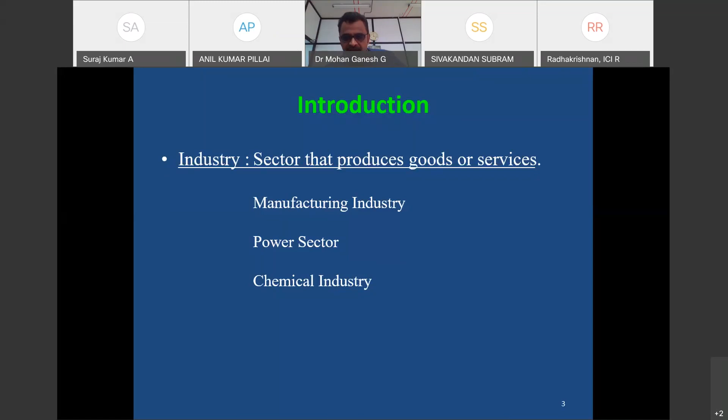Introduction. You know very well about the industrial sector. Many sectors are there that produce goods and provide services for us. Out of all, the manufacturing industry, power sector, and chemical industry are the most common ones directly helping the civil engineering community. In the power sector, a number of power plants produce power and electricity for all, but at the same time they cause air pollution as well as land pollution.

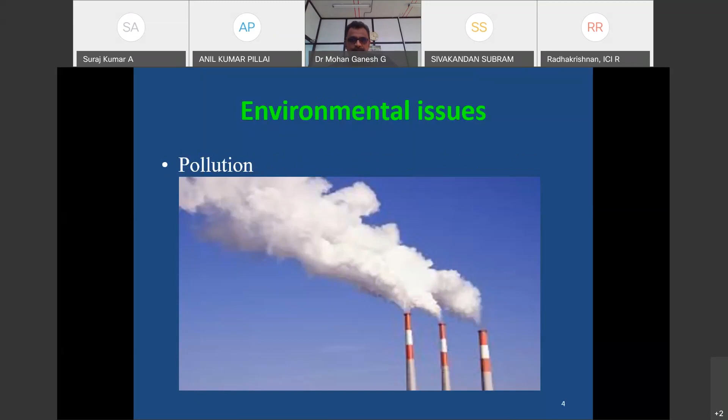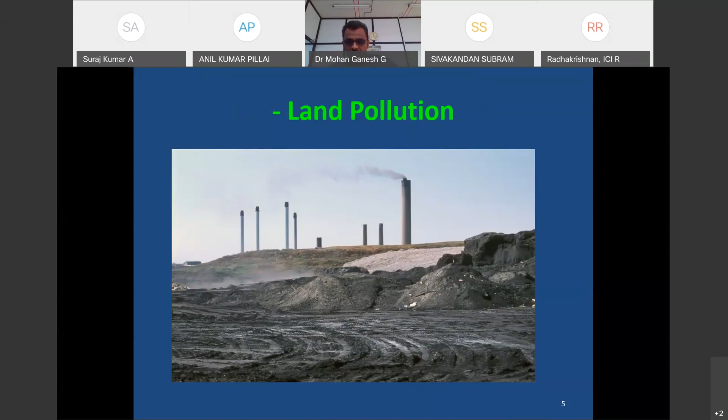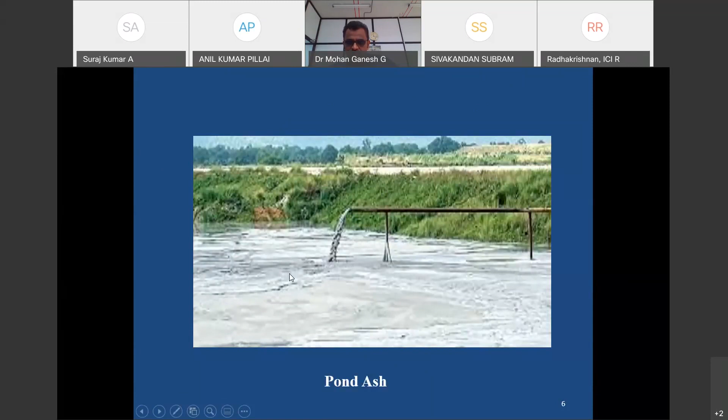This picture shows the waste bottom ash and waste pond ash dumped near an unused pond. Here, this picture shows the wet pond ash being pumped into the ash pond, where it is permanently stored for 10 to 15 years or even 20 years. Here is the bottom ash, which is collected under the hopper.

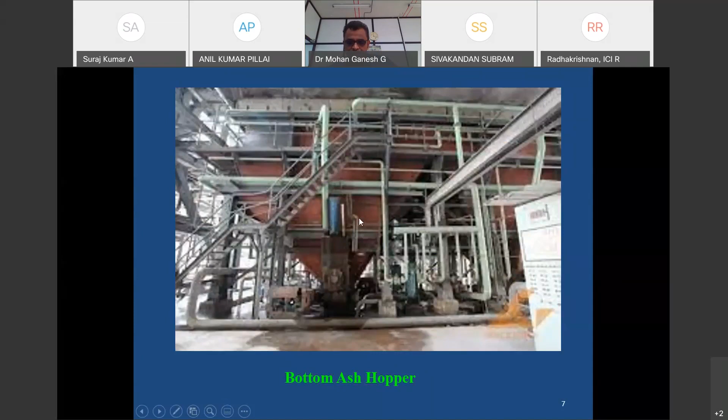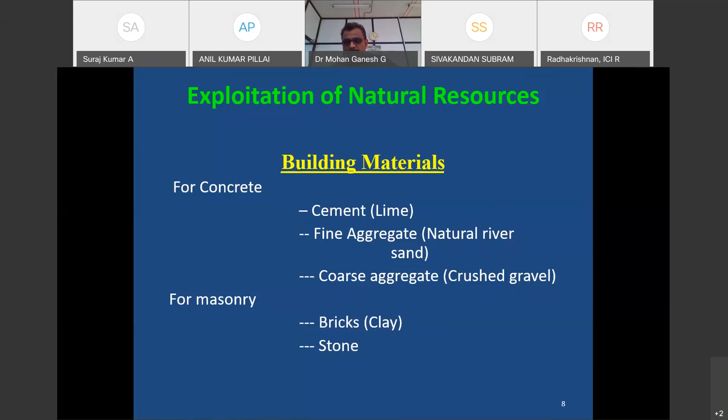In the exploitation of natural resources, for our civil engineering building materials, for cement we have to depend on lime. For sand, we depend on the natural river. For coarse aggregate, we need crushed gravels. And for manufacturing bricks, we need clay. So for all our civil engineering materials, we need natural resources. But over a period of time, now we are facing the sand problem, so we forcibly have to use manufactured sand.

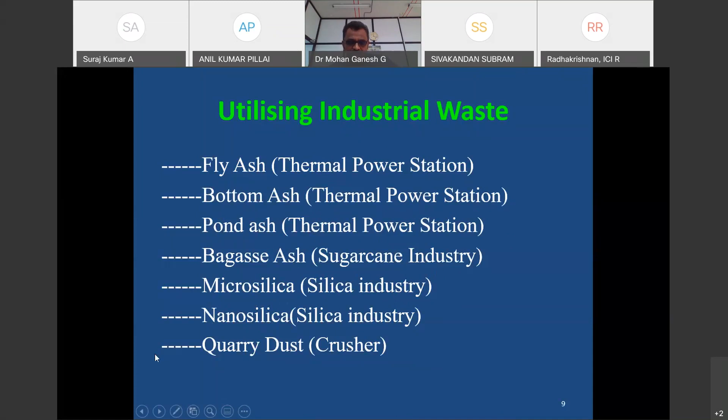Various industrial wastes: the thermal power station produces fly ash, and again the thermal power station produces bottom ash as well as pond ash. Sugar industries produce bagasse ash. Silica industries produce micro silica, and also nano silica. The crushers produce quarry dust or M-sand now.

So for any alternate building material we want to choose, first we have to find out the physical and chemical composition of the material.

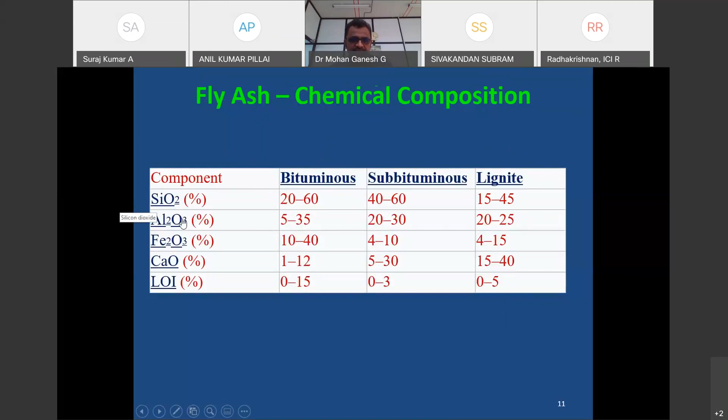Now for fly ash, there are 3 different types, Class C and Class F being the most common. Class C means high calcium fly ash, from lignite based sources, so our Neyveli Lignite Corporation produces lignite based fly ash. Other power plants produce Class F fly ash. The composition of the ash again includes silicon dioxide, Al2O3, ferric oxide, and calcium oxide.

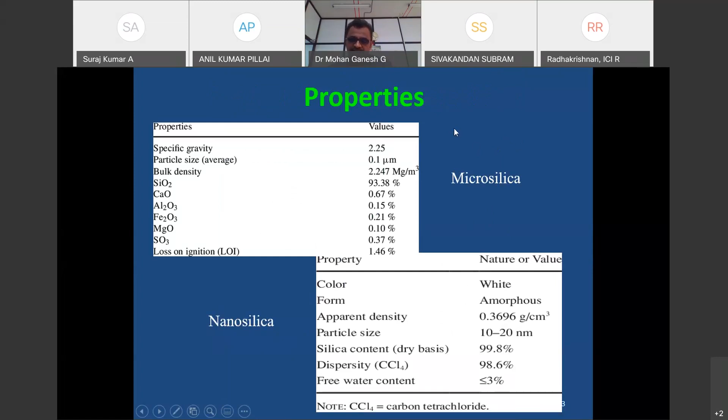Sand also generally we are using contains silica, alumina, and other materials. Now microsilica, again the most common material nowadays we are using, is obtained from the silicon industries. Here is its chemical composition.

So all the materials which are having CaO, silicon dioxide, or Al2O3 aluminum oxide - for choosing any alternate material, first we have to find out how much percentage of either calcium oxide, silicon dioxide, or aluminum oxide is there. Suppose some new material does not contain any of this, then it may not be suitable for our construction work, because we have to find the suitability of the material.

That is the reason I said in the beginning that for any alternate material, it is required to find the chemical composition first. Then only we can get the binding property of that. Otherwise, it will act as an inert material only.

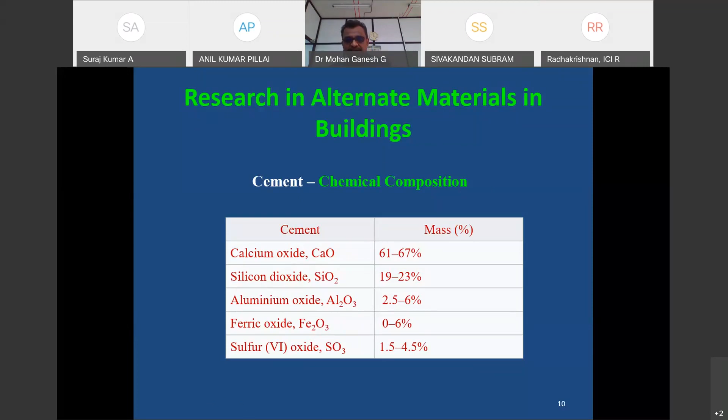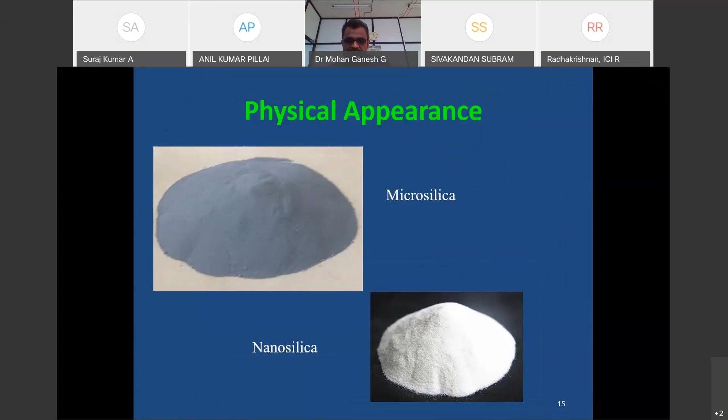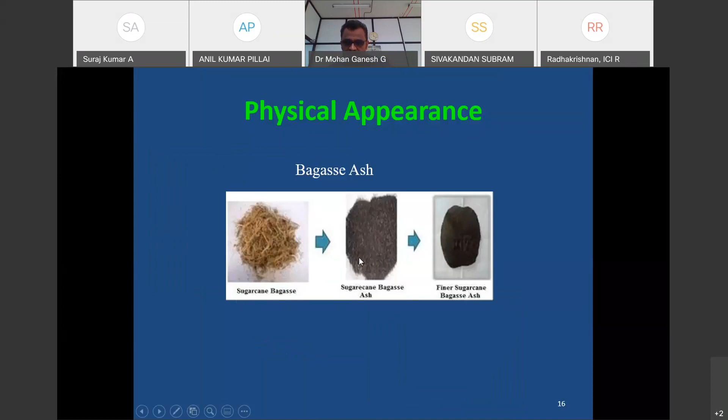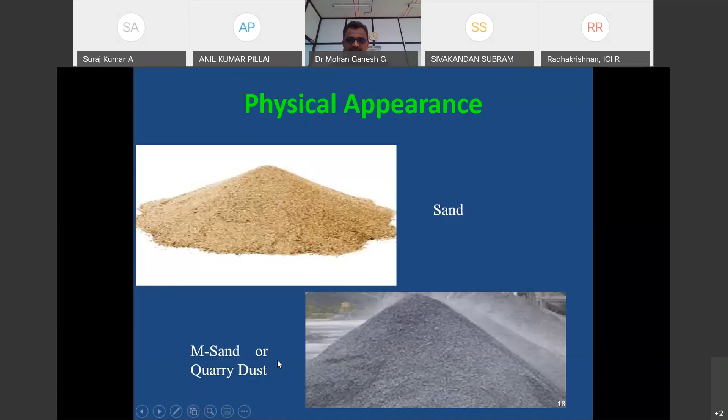Now mainly for either fine aggregate or coarse aggregate, we have to do the particle size distribution. Then only we can apply the particle packing theory. So we have to conduct the test and plot it, then adjust the particle size distribution accordingly. Then only we can get proper bond or proper interlocking between the fine aggregate or coarse aggregate in the concrete. This is compulsory for both fine aggregate and coarse aggregate.

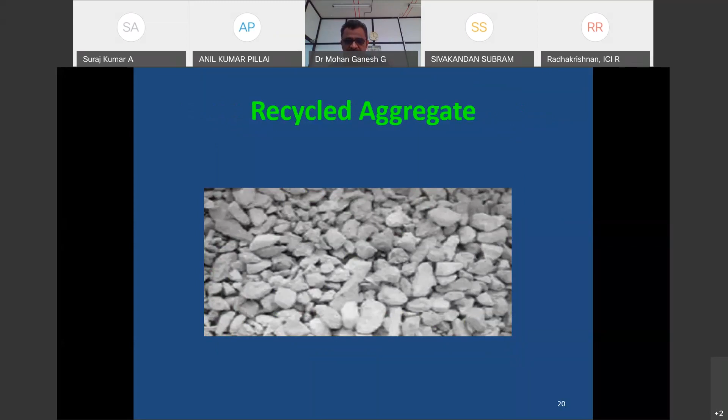Nowadays, people have also started to use recycled aggregate, mainly from the demolition of concrete or the demolition of buildings. For this also, again, we have to use the particle size distribution.

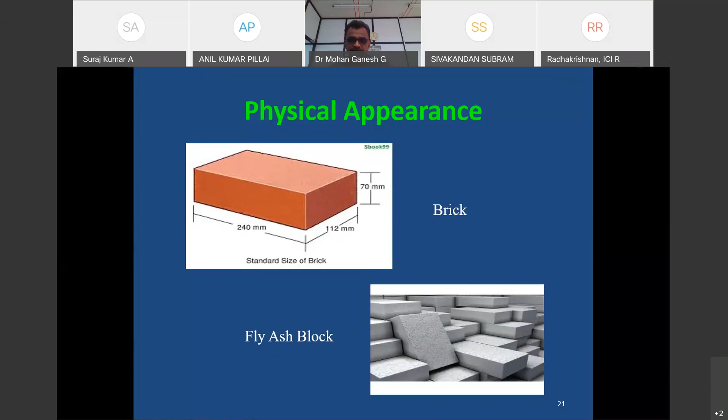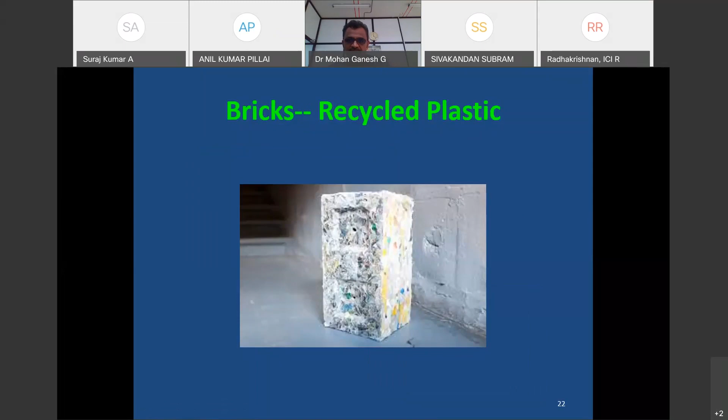The other one is recycled plastic. Nowadays, the disposal of plastic is a common problem. Some institutes, some R&D organizations, have initiated this, and now they are making bricks using recycled plastics.

For any alternate material, I want to say that first we have to check the physical property and find the chemical property. Then only we have to proceed further.

Then the next property is mechanical property. Mechanical properties mean the compressive strength of the material, tensile strength of the material. Then we have to find the flexural strength of the material. These are the basic 3 properties needed for the structural aspect of materials.

Then for the durability aspect, we have to conduct 4 basic tests: rapid chloride permeability test, water absorption test, sorptivity test, and chemical attack test.

Now, just out of the box, I want to give one virtual assignment to you. These are all the materials I want to give: 1 liter of milk, 1 liter of water, 1 kg of sugar, 1 kg of tea powder, elachi, and masala. The requirement is you have to make 300 ml, 2 cups of tea, one for you and one for me.

So suppose now nearly 150 participants are there. Is it possible? Can we get the same quality of tea from all? Obviously, it is not at all possible, because some person may use more quantity of milk, some person may use more quantity of water, other person with sugar or without sugar or light sugar.

Some kind of people are there, they want strong tea or light tea or normal, medium. So many terms are there. Again there are additional add-ons like elachi or masala. Somebody will use elachi tea, and if it's free, they want to go for the full flavored elachi strong tea. So with 150 people, it's too tough to find the same tea from even 2 of them.

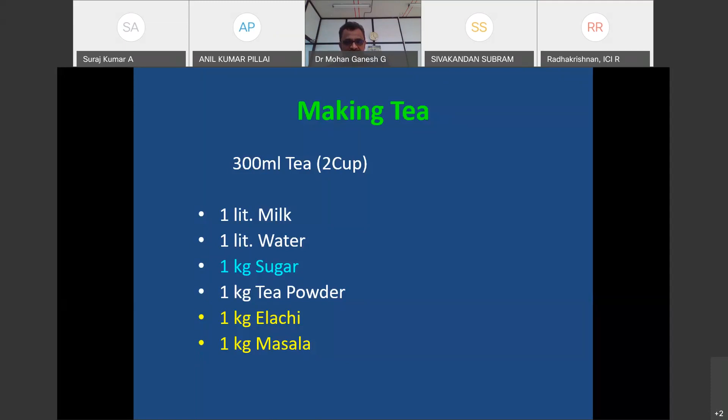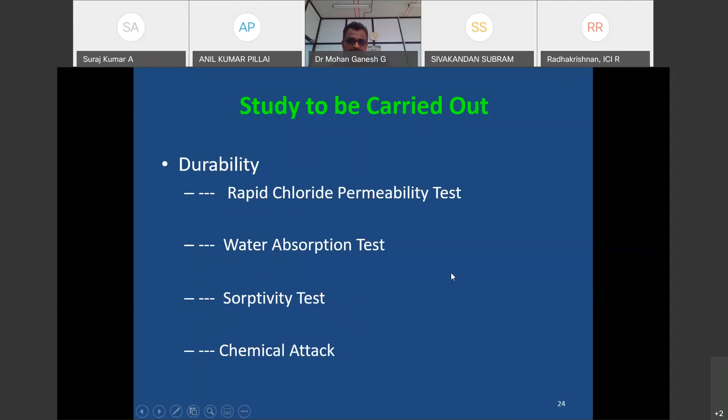Now, for any alternate material, first we have to do the chemical analysis, then physical analysis also parallelly. This is the first phase. Second phase, the detailed mechanical properties we have to find out, like compressive strength, tensile strength, and flexural strength. Then the third phase for durability aspect, RCPT or water absorption or sorptivity or chemical attack we have to do.

So at VIT, we have done research on so many alternative materials in buildings. We are going to see all of that. Now, before that, I want to talk about waste management.

What is waste management? What is the need to do waste management? How to control that? If you are not doing the waste management, what are all the effects we are going to get? So for all these questions, I have given the answer. The activities and actions required to manage waste from inception to disposal, that is called waste management. That includes collection, transport, treatment, and disposal of waste, together with monitoring and regulation of the waste management process.

The main aim to do waste management is to reduce the adverse effect on health and environmental aspects. One more thing I want to say is that the practice is not at all uniform in all countries. For example, the Singapore government, advanced developed like US or UK, they are following stringent rules for maintaining the waste. But in India, we are liberal, though nowadays we are changing the rules.

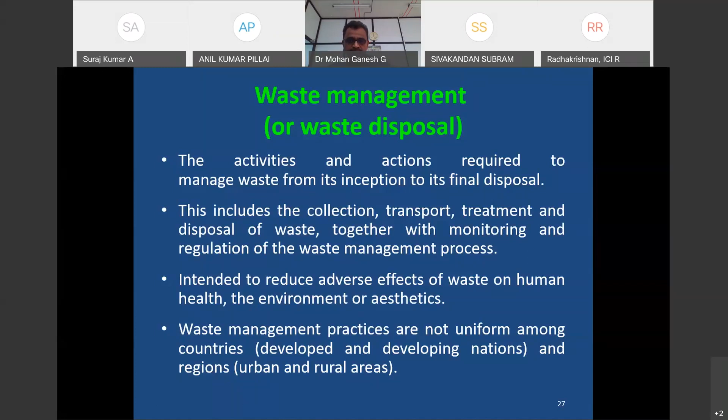Now, for making good sustainable concrete, we have to utilize industry waste or byproducts to replace the raw materials for making concrete. The raw material may be either cement, fine aggregate, or coarse aggregate. So with that, easily we can make the sustainable concrete.

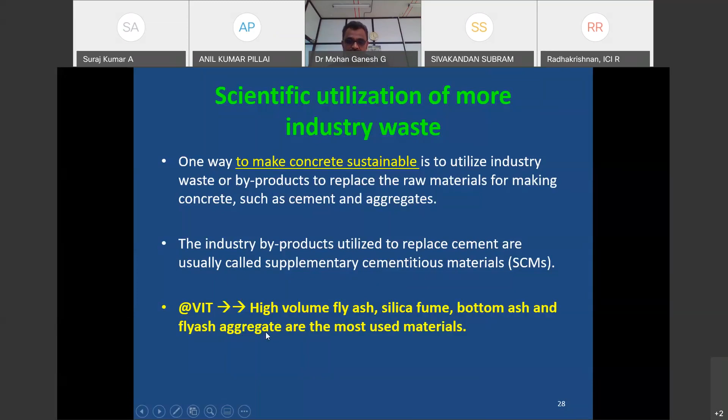Here, suppose if we replace the material with cement, it is called supplementary cementitious materials, simply SCMs, also called binder materials. At VIT, we have done high volume fly ash concrete, up to 60% replaced with fly ash. Silica fume also we have used, up to 10%. Bottom ash up to 50% we have used in place of sand. Again, fly ash aggregate also we have done in place of coarse aggregate. These are the most common materials people are using nowadays.

On the other hand, the indirect benefits are: by using more quantity of fly ash, it reduces the rise in temperature inside the concrete. So fly ash concrete or high volume fly ash concrete is recommended for mass volume concreting. Further, it reduces shrinkage, increases durability, and can gain strength at later days, 56 days or even 90 days. At VIT, we have even done up to 365 days compressive strength.

The next one, bottom ash. Bottom ash mainly nowadays people are replacing with fine aggregate. Nowadays some power plant bottom ash is equivalent to cement, so people are replacing even with cement also. But here I want to limit it to only fine aggregate, since NLC bottom ash is equivalent to our sand, which we will see later. So by using bottom ash in concrete, it conserves the river sand, reduces the cost, and reduces disposal problems. This is a direct benefit.

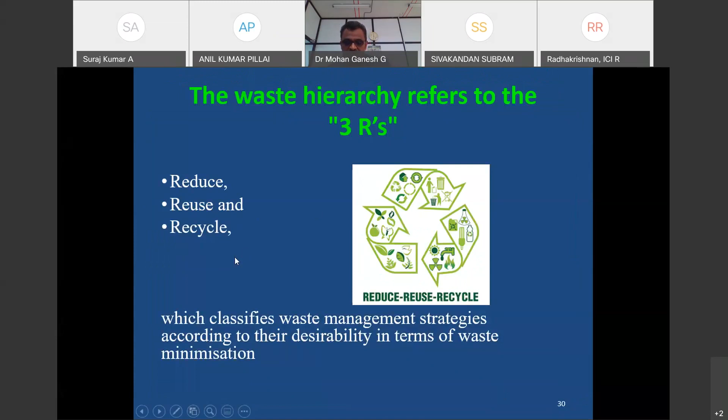Like the 3 R's you all know - reduce, reuse, and recycle. So based on this only, we have used fly ash, bottom ash, and fly ash aggregate in the concrete.

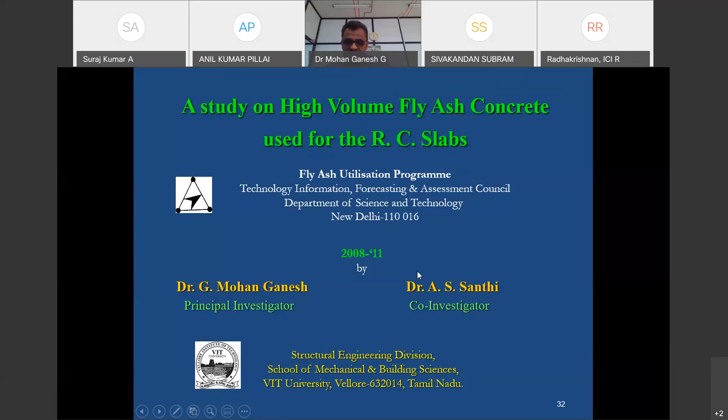It was done in the years 2008 to 2011, 10 years back. I was the principal investigator. My colleague Dr. A. S. Santhi was a co-investigator. I am going to give the details about this project. What is the need? Already I said to you, we need power. So the easiest way is to increase the number of thermal power plants. Once we construct a thermal power plant, automatically the problem will be the disposal of the fly ash.

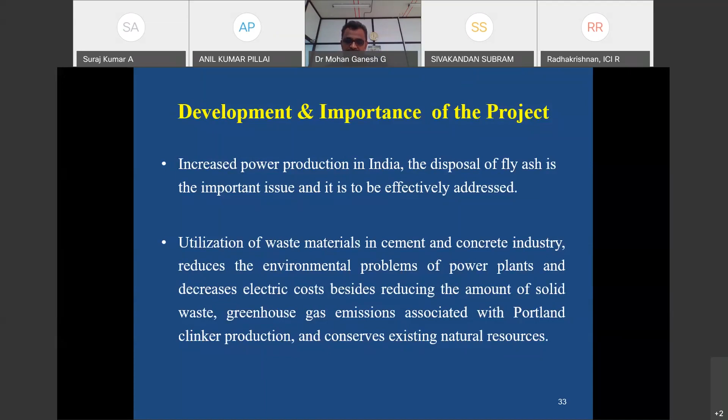So to use it effectively, the best, easiest way is to put it in the cement. The present IS code gives a recommendation of up to 35% fly ash in place of cement. That's called PPC, everybody knows, but most people are not directly using it, though RMC plants are using it. In this study, we went up to 60% replacement of cement with fly ash. For that, we have done a very detailed program. It was a 4-year study.

In the first phase, we collected the different materials and studied the compressive strength for different grades and different percentages of fly ash with different types of curing for various periods. In the second phase, we did various hardened tests, mechanical properties like compression test, split tensile strength, flexural strength, and chloride ion test. In the third phase, we did the RCC beams and slabs for the scaled models.

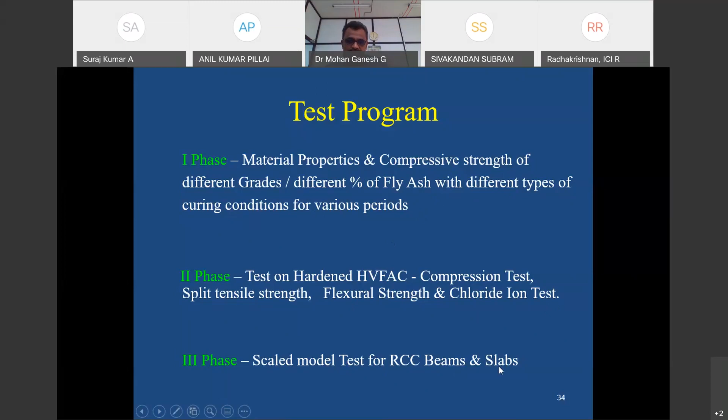For this project, we used a lignite-based fly ash obtained from the Neyveli Lignite Corporation, and class F fly ash, that is low calcium fly ash, from the Ennore thermal power plant. Using a high volume of fly ash in concrete will reduce the consumption of cement as well as the CO2 emission. This is a thumb rule everybody knows: production of 1 ton of clinker releases 1 ton of CO2. So with 50% replacement, nearly half a ton of CO2 we can minimize.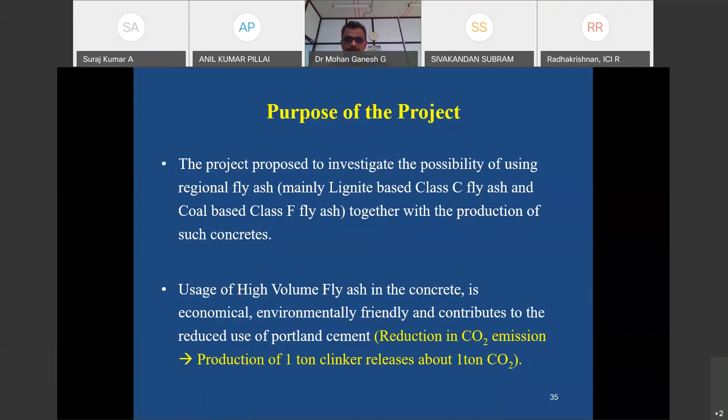Now, either IS code or Euro code, for finding the strength, they always say a minimum of 3 cubes we have to test at 7 days as well as 28 days. For M30 grade, that is the process: after 28 days of curing, we do the compressive strength test. But for this project, since we went with different percentages, we cast nearly 50 plus cubes in a single casting. This picture shows the complete view of one set of casting.

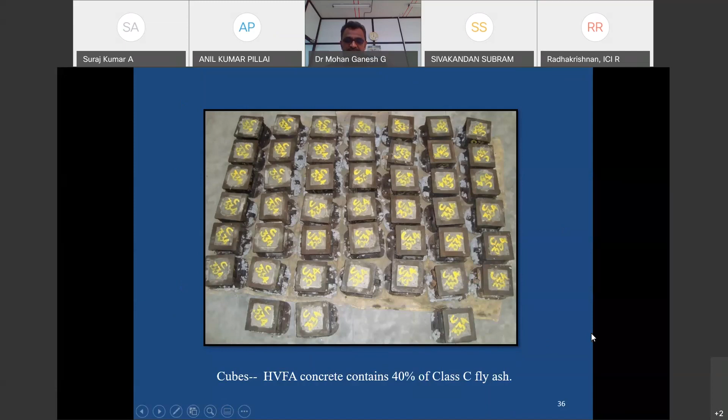For curing, we followed different types of curing, such as accelerated curing. What is the meaning of accelerated curing? After 24 hours of casting, the molds with cubes were kept in hot water and we maintained around 98 degrees centigrade for 3.5 hours. After that, we demolded and did the testing, which gives nearly the 28-day compressive strength of the concrete.

The main purpose of these two alternate curing methods is that we can easily get the correlated 28-day compressive strength of the concrete. So we need not wait for 28 days. That is the main advantage of these two methods. The IS code recommends it, ASTM also recommends it. So we have done it for all our mixes.

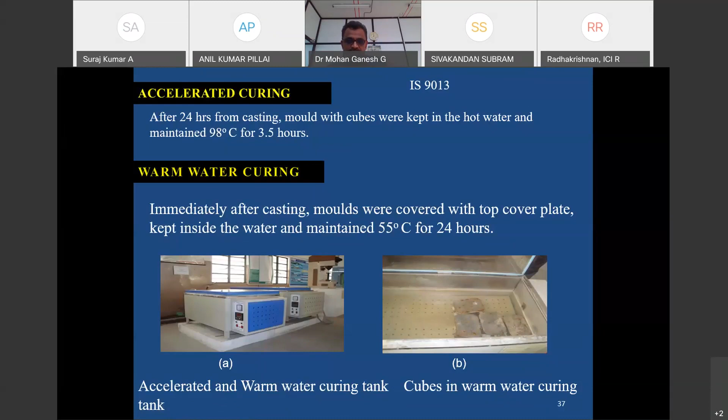Normal curing, you know very well. In the beginning itself, I said to you, up to 365 days curing we have done. The main reason for 365 day curing is we have replaced the cement with 60% of fly ash. So for that only we have done the 365 day. And again, already I said to you, the durability is the most important one.

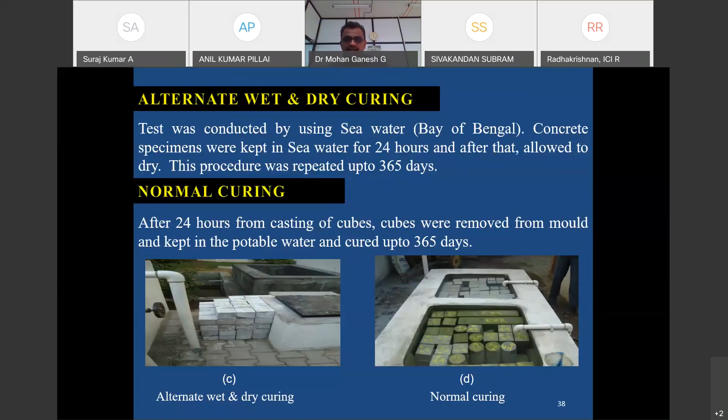So for this, we have collected the water from the Bay of Bengal, and parallelly we created a tank and we put all the specimens into the tank on alternate days. And this procedure was repeated up to 365 days to check the durability. Earlier we thought of simulating the seawater, because if we simulate the seawater, easily we can maintain proper quality control. But we want to know what is the behavior in the actual water. So for that only we directly collected it from the Bay of Bengal.

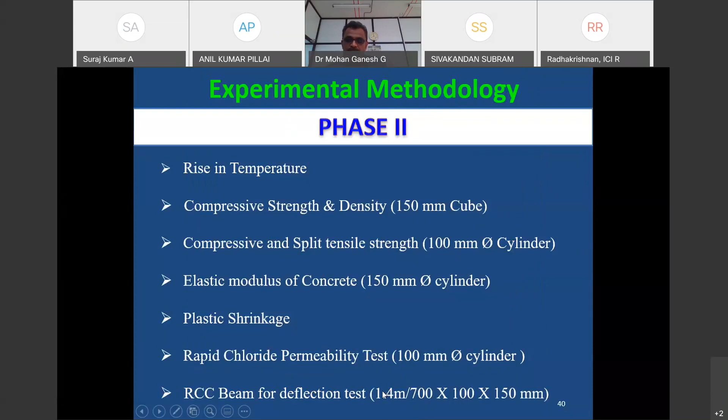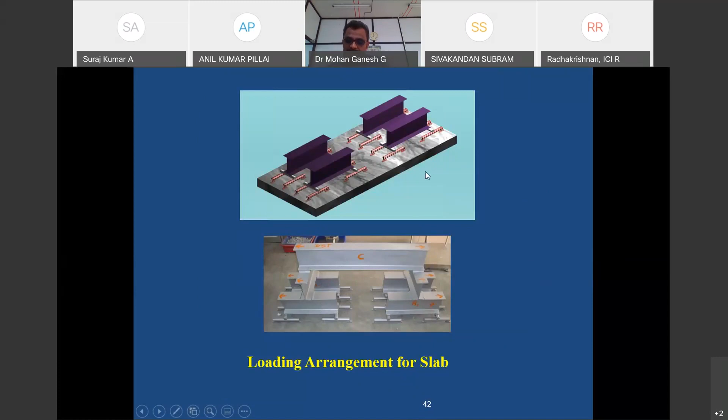This is the RCC slab. Using the hydraulic jack, we have applied the load. So this load is divided into 2 beams, and these 2 beams again divided into 4. And again this is divided in multiple ways. So in that way we have obtained the UDL on the RCC slab. All the readings we have recorded with the help of the data acquisition system.

Now I want to go for the bottom ash as well as fly ash aggregate. Here we have done the mix design with the low binder content, 333 kg per meter cube. Simultaneously, it is replaced with 0% of fly ash, 20, 30 or 40. And parallelly, we have replaced the fine aggregate with the bottom ash, which we obtained from the Neyveli Lignite Corporation. 0, 30, 60, and even 100% replacement of fine aggregate we have done. So at 100%, we did not use fine aggregate at all. Only bottom ash we have used.

For comparison purposes, we have maintained the constant binder content, and the slump cone value also at 10 to 20 mm. Here we have used high range water reducing admixtures, the superplasticizer.

4th generation SP we have used. So for maintaining this W/B as well as slump cone, and to get the proper strength and durability of the concrete, because nowadays super plasticizers are part of our concrete, so we have to add, so it will give a lot of positive effect to our concrete structure.

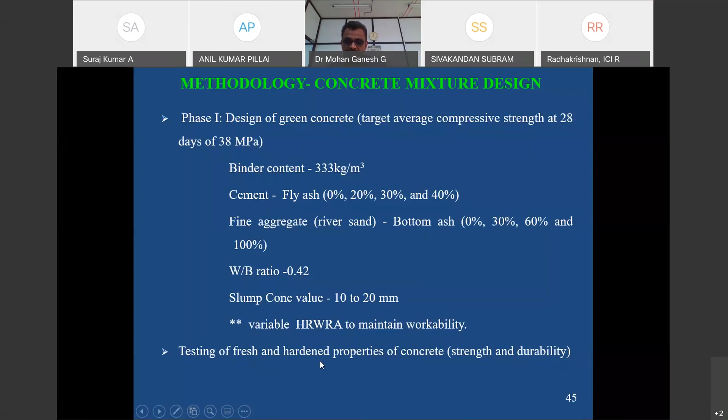So with this, we have done the testing on fresh concrete as well as hardened properties of the concrete. Hardened property means strength and durability aspect. So this is the methodology we have followed for testing the various materials. The fly ash, we have used the ASTM C618 for checking the physical properties of fly ash, and chemical properties like XRD, XRF we have done, and particle size distribution; consistency, specific gravity, initial and final setting time of the cement we have done.

And for fine aggregate and bottom ash, again the chemical properties using XRD and XRF, and various physical properties we have done: specific gravity, sieve analysis for grading, and water absorption. And for coarse aggregate and fly ash based aggregate, again the physical properties, specific gravity, impact test. Since we manufactured the fly ash aggregate, we should know what is the impact value as well as crushing value

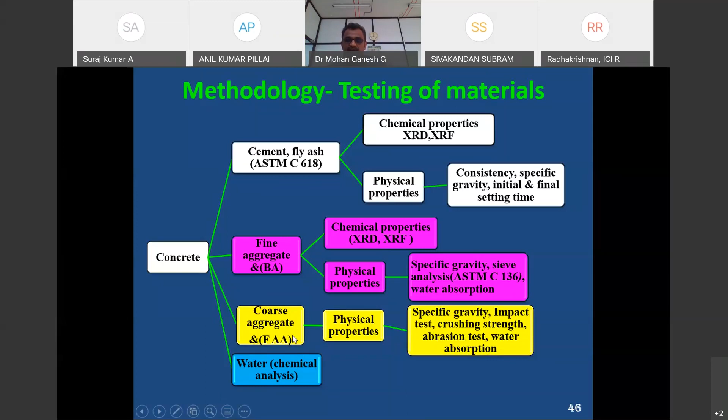and abrasion test. Everything we have done was compared with the coarse aggregate, and we have done the water absorption also. So finally, suppose you are using the fly ash aggregate, it should be at par with the coarse aggregate. There should not be any deviation.

The next phase, we have done the green concrete with fly ash and bottom ash. Here, the fly ash either 0%, that's for control mix, 20%, 30%, and 40%. Again, we have used the bottom ash in place of the sand with 0, 30, 60, and 100%. And these are the fresh properties of the concrete: slump cone test, rise in temperature. The slump cone as per ASTM standard C143, and these are all the various hardened properties of the concrete we have done. Again, the hardened property we can classify into strength as well as durability aspect.

The strength means the basic is compressive strength. So for finding the compressive strength, normal curing, then accelerated curing, warm water curing, we have done it. Strength aspect, the strength like split tensile strength, flexural strength, and modulus of elasticity we have done. And durability, RCPT, rapid chloride permeability test, plastic shrinkage, and drying shrinkage we have done.

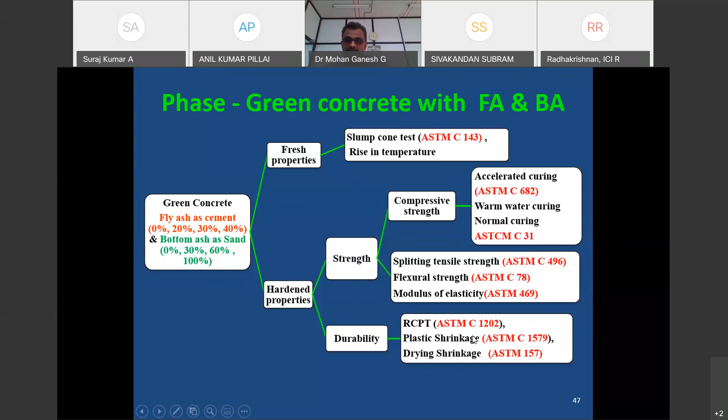Since the bottom ash is a coarser material, we have to do proper dosage, proper mixing, and proper care. If you are not doing it, it will give a reverse effect. So in that way, the plastic shrinkage will be very high, as well as drying shrinkage also will be very high. So we have to be very careful while using the bottom ash, with super plasticizer and all. So this is a must one. We have done all, and it was compared with ASTM standard.

Now, this is a basic property. Already I said to you. Sand as well as bottom ash, we have done the sieve analysis, and the particle size distribution curve we have plotted. This blue line shows the curve for the bottom ash, and red for the sand. Okay, both are comparable, and all other properties are given here.

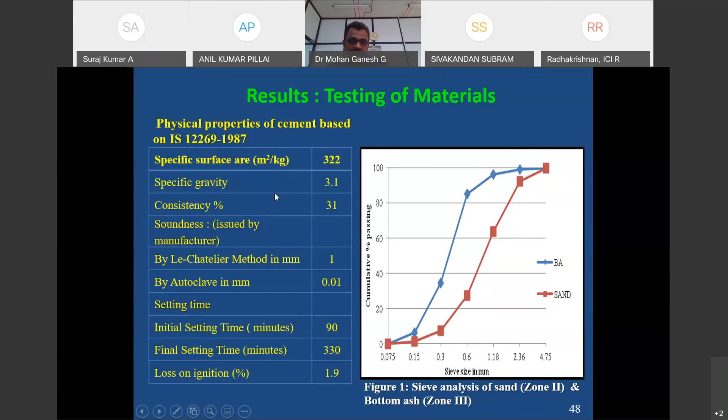Again, the chemical properties of fly ash, bottom ash, and cement we have compared with the help of XRF and XRD. This is the XRD, and XRF directly gives the various composition, how much percentage of silicon dioxide, aluminum oxide, or ferric, or calcium, or magnesium. Directly it will give for the particular sample. And moreover, we have to do this on a daily basis for different samples. Then only we can get the average value. So this is the way.

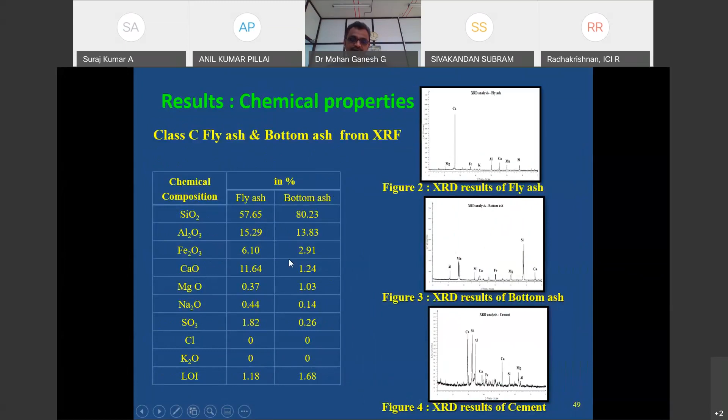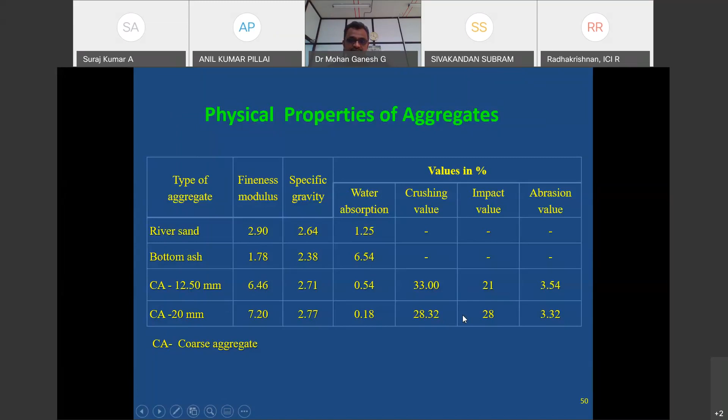So the properties of fly ash and bottom ash are comparable with cement and sand. So we have done further work. The physical properties of the aggregate: the river sand, these are values for the material we have used. Bottom ash, fineness modulus, specific gravity, and water absorption. And coarse aggregate 12.5 and 20 mm. These are all the various values which we have compared with our manufactured fly ash aggregates.

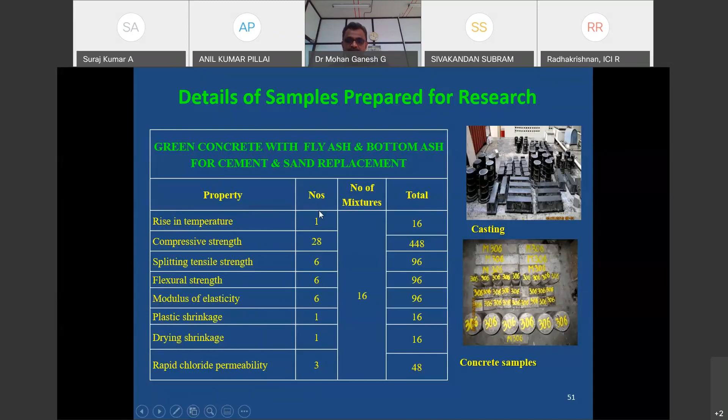So in the beginning itself, I said to you, for any alternate material, we have to do the rigorous testing. So in that case, for this mix, we have done various tests like rise in temperature, compressive strength, split tensile strength, flexural strength, modulus of elasticity, plastic, drying shrinkage, and RCPT with various number. And this is for per mix, how many number of specimens we cast at our lab. This is the total number of specimens.

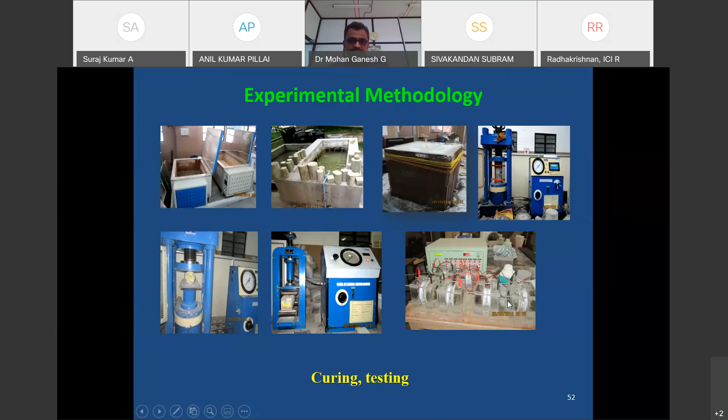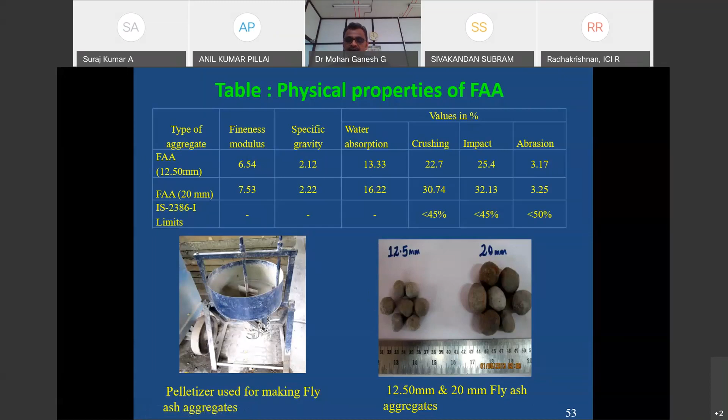Now the fly ash aggregate, already manufactured fly ash aggregate, we have compared with our aggregate. So these are all the values for our fly ash aggregate concrete. Here the pelletizer, small pelletizer, we have fabricated ourselves, and with fly ash, nearly around 10% of cement we have used as a binder and manufactured two different sizes of aggregates. This diagram shows the 12.5 mm size of the aggregate, and this is a 20 mm size of the fly ash aggregate. These are all the tested values of our fly ash aggregate: fineness modulus, specific gravity, water absorption, crushing, impact, and abrasion. It should be at par with our fine coarse aggregate. Then only we have to use this in the concrete structure.

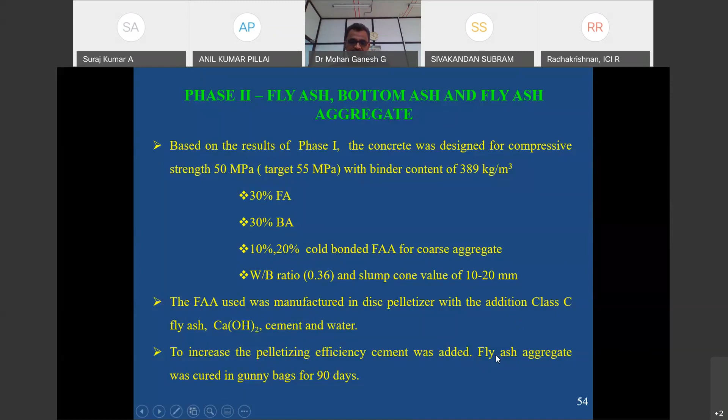Now in this, again we have divided our work into multiple phases. Our target compressive strength is 55 MPa, so easily we can achieve 50 MPa with a binder content of 389 kg per meter cube. In this, we have replaced 30% fly ash, 30% bottom ash, and 10% or 20% fly ash aggregate. And for comparison purpose, we have maintained the constant water binder ratio as well as slump value also. Here, for the fly ash, we used the class C fly ash and some small quantity of, I think, 2% of calcium hydroxide plus cement as a binder to make the pellets. So for increasing the pelleting, we have added the cement. And all the manufactured aggregates were kept up to 90 days in the gunny bags.

Again, for concrete, the fresh property and hardened property. Slump test and rise in temperature we have done along with all other tests. And hardened properties, strength and durability, these are the two aspects. This already we have seen. So we have done all for each and every mix; again and again we have to do, and we have to benchmark ourselves. Then only we have to use it for further purpose.

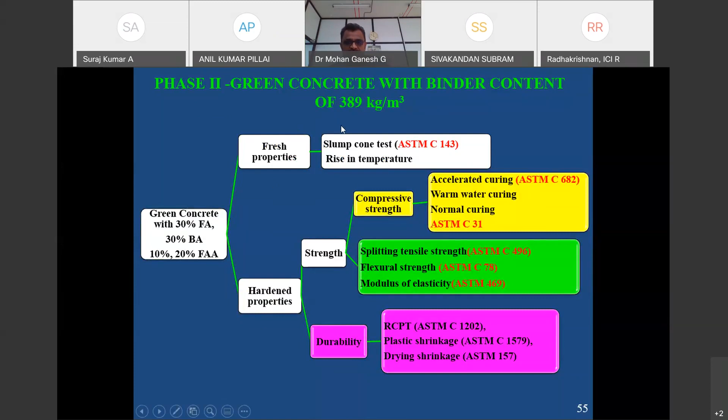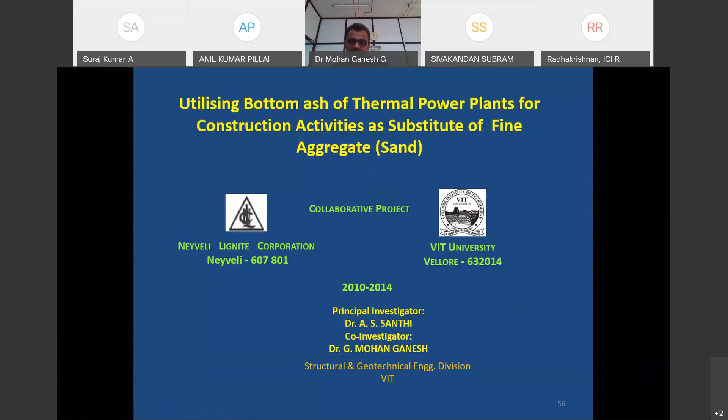So whatever I have now said, one of our PhD scholars has done this work. Based on this work only, we have made a proposal to Neyveli. It's a joint collaborative project. It was executed between 2010 and 14. I was a co-investigator. My colleague Dr. Santhi was the investigator. In this, we have used the bottom ash for construction activities as substitute of fine aggregates. Here you know the present problem. Last 2 years, it is too tough to get the sand. So the cost of the sand was very high. But nearly 8 to 10 years back itself, we submitted a proposal to NLC, they granted, and we have given a recommendation. All the details we will see later.

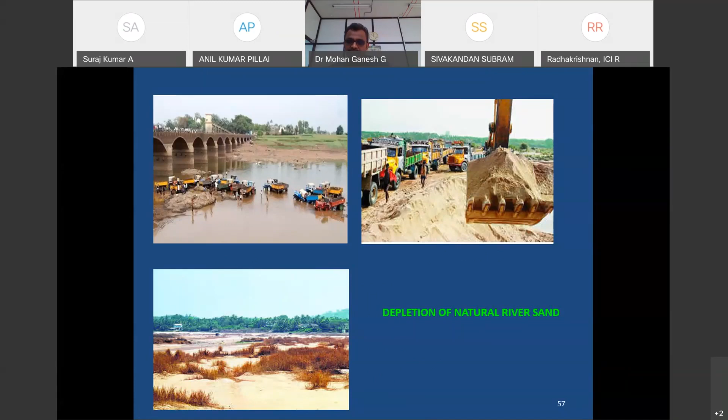So due to continuous usage of sand, we are facing the problem. Now the cost is very high. Even the government or code is insisting us to go for the manufactured sand. So the best alternative one is bottom ash. Up to 2010, the Neyveli Corporation simply dumped the bottom ash. It is one of the waste products out in the ash pond. For our earlier project, for our fly ash project, for our DST project, we went there, we had an interaction, and based on that we have done some trial tests, and then we submitted the proposal to NLC. Then we have executed this.

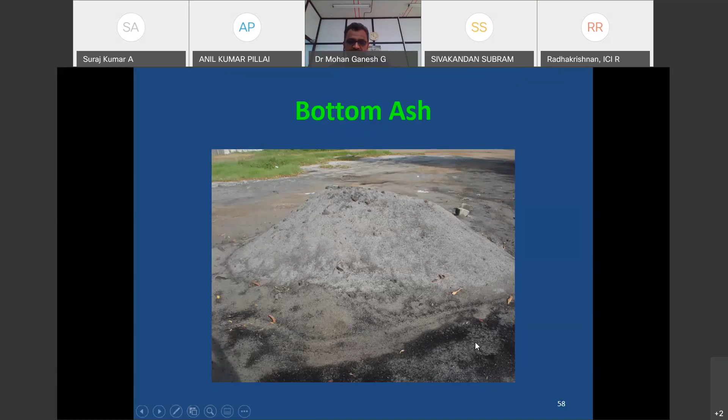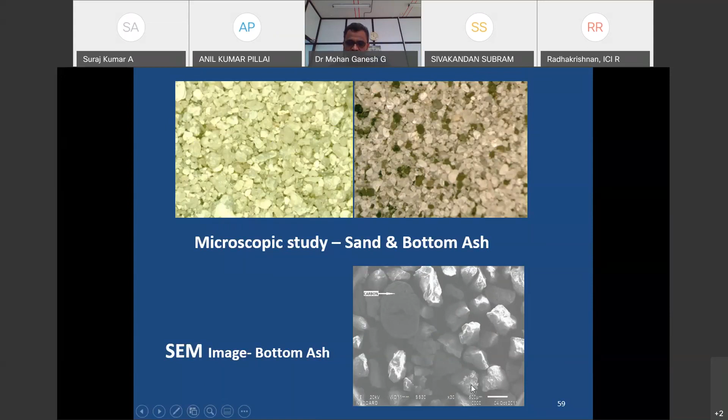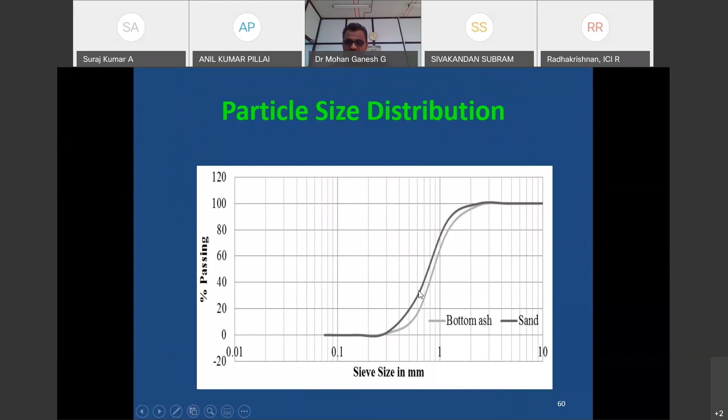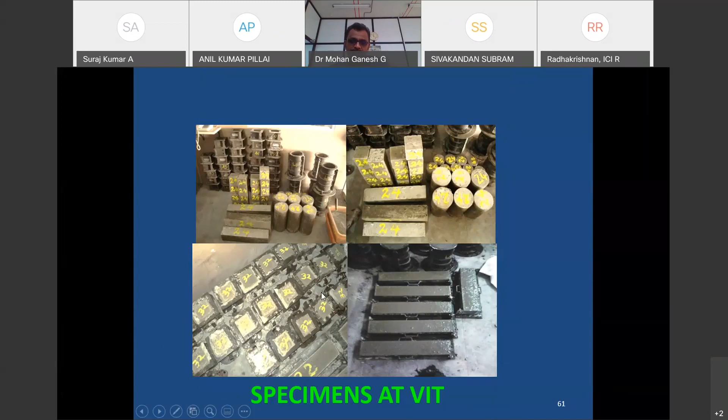And again, we have done the particle size distribution, so both are comparable, bottom ash and sand. As usual, we have done a detailed test for the fresh stage as well as the hardened stage. Many cubes for each mix, nearly 40 plus cubes we cast at a time. We have done rigorous testing, and finally we have given a recommendation to NLC.

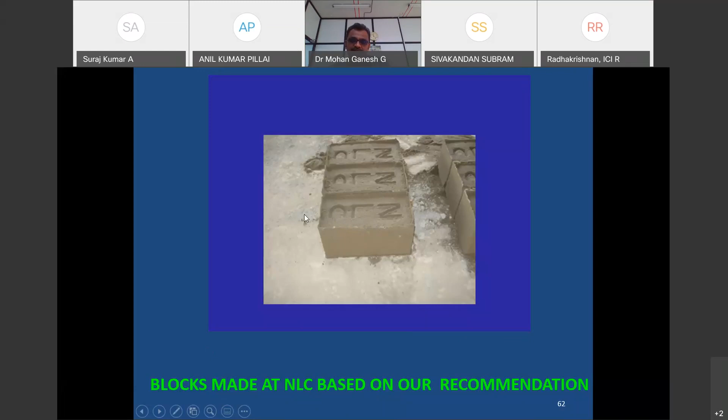And parallelly, NLC are using hollow blocks or solid blocks for their construction work. So we have done some study on this also, and in this we have completely eliminated the fine aggregate, and we have given a recommendation to use bottom ash for making either solid blocks or hollow blocks. For the last 8 years, Neyveli Lignite Corporation has been using it for their construction activity.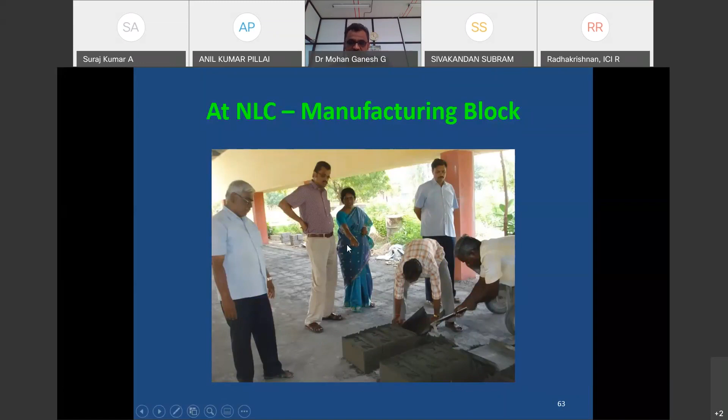And in between we visited for the trial mix; the NLC people cast the blocks in front of us. Both are NLC officials. This is my colleague, Dr. Shanti. So we have seen it and we have given a recommendation.

And finally, with rigorous tests, after nearly 3 years, we gave our recommendation to NLC, and based on that, they constructed a full building using minimum sand. For concrete, they replaced nearly 50% of sand with bottom ash. And for all the remaining components, they used solid blocks made with fly ash.

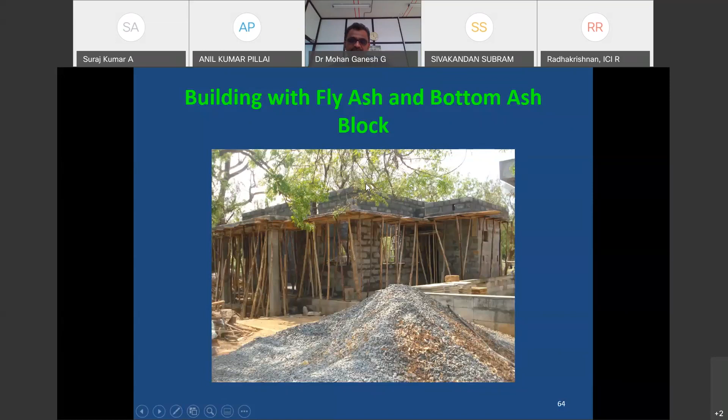At the end of that, we did testing with ultrasonic as well as rebound hammer in the presence of NLC officials. The building is certified. So finally, this is the experimental building, which is at the precasting yard. Last month also I was there at NLC. There is no issue in this building.

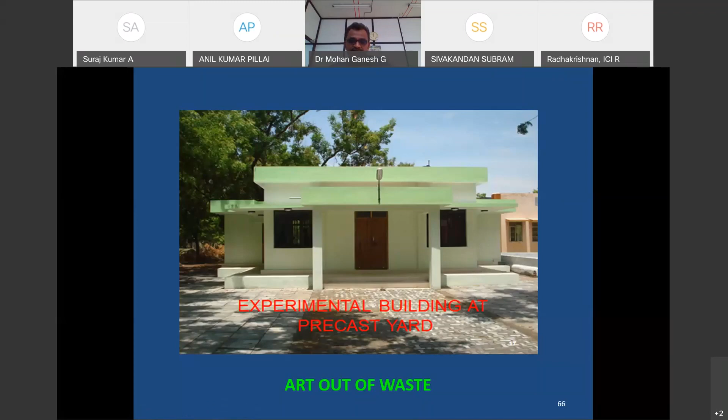They are using it for seminar purposes. Some students are going and doing their projects. They are even using it for official meetings. This was constructed at the precasting yard. The building was inaugurated by the Neyveli Lignite Corporation CMD Sri Surendra Mohan in the year 2014.